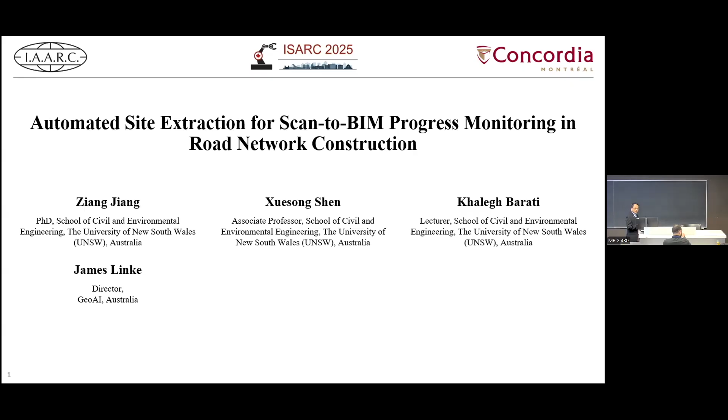Since then, I tried to take the recipe Dr. Alvarez explained this morning, and it took me 10 years to find the industry partner. Then we tried to grow from a little collaboration. Ten years later, we have grown from scratch to about $3 million in research grants with one single industry partner. This is only a small piece of the collaboration we have been working on recently.

A little bit of background about our work. We look at construction project performance, especially progress monitoring, cost and time control. As Dr. Carl explained about productivity in the second keynote today, one of the areas we're focusing on is cost overrun. According to some general studies, there's an average cost overrun of about 28% for infrastructure construction projects. I think that's very common worldwide.

For our study, we look at reality capturing, mobile laser scanning of infrastructure construction, to understand how the progress is going. Are we on the right track for time and cost? Some of the research challenges we have faced: when we're talking about Scan-to-BIM, most studies so far, as you've seen in quite a few presentations at this ISARC conference, focus on existing assets or the built environment. For example, we scan the road and then develop the BIM or digital model of the road.

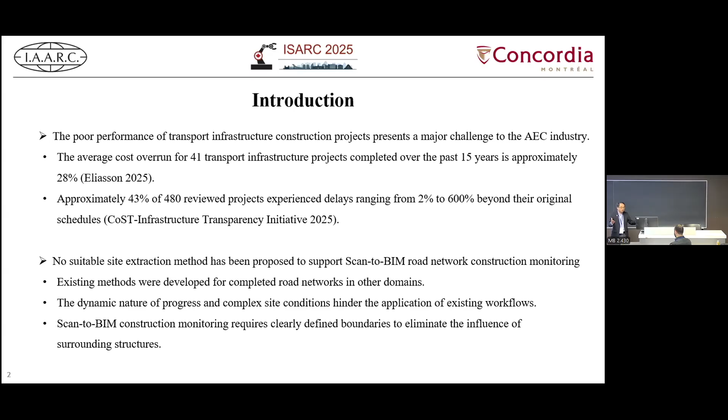At the same time, people are talking about machine learning or data-driven methods. But for construction progress monitoring, I think the biggest challenge would be the availability of data, not only the raw data but also the training samples. Who is going to collect the data for you? And who is going to process the data so it can be used as training samples? Those are some practical challenges in the construction industry.

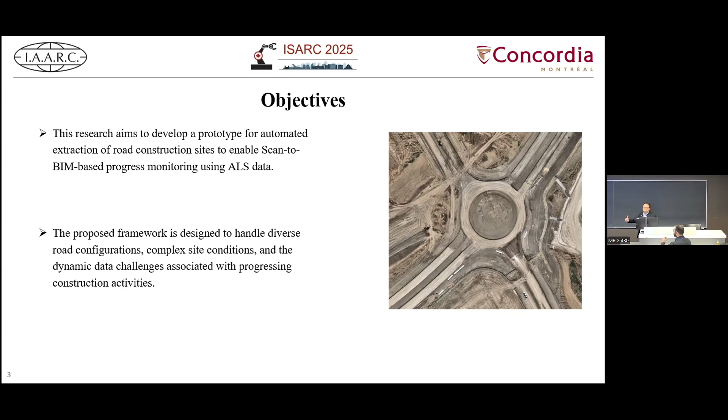That's the reason we developed this project, which aims to develop a fully automatic system that can extract the progress of road construction from some of the basic Scan-to-BIM methods we have developed. The input data is airborne LiDAR data, that's airborne laser scanning. We try to extract the boundary of the key road sections from very noisy and complex site conditions.

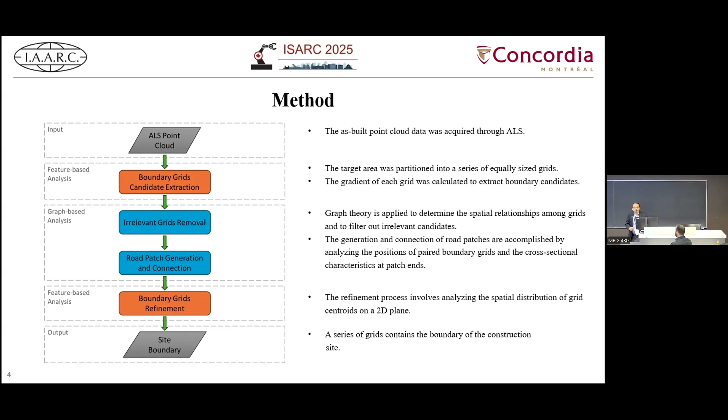Here's a quick workflow of the process. First, we take the airborne laser scanning point clouds, and Blake, my PhD student, developed some feature-based methods and also graph-based methods. Finally, we combine them together to generate the site boundary from this process.

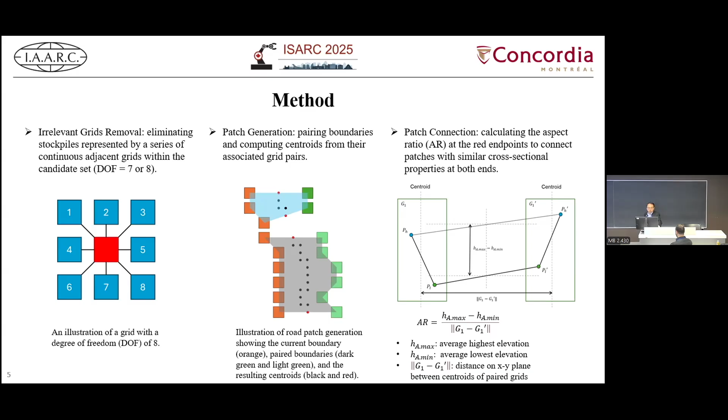Here's a little insight about the methods. In the first stage, when we look at the actual area, we focus on the construction site. Blake has developed methods to eliminate the information we don't need, for example, stockpiles of raw material, which are not relevant to the road construction. Other methods cover patch generation, defining the boundary of the road, and determining the center of the road.

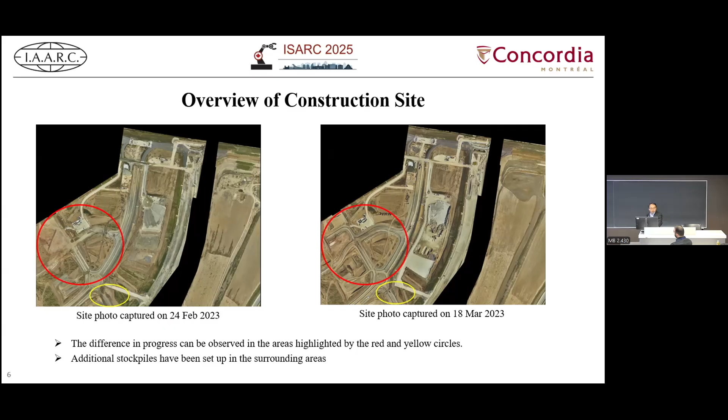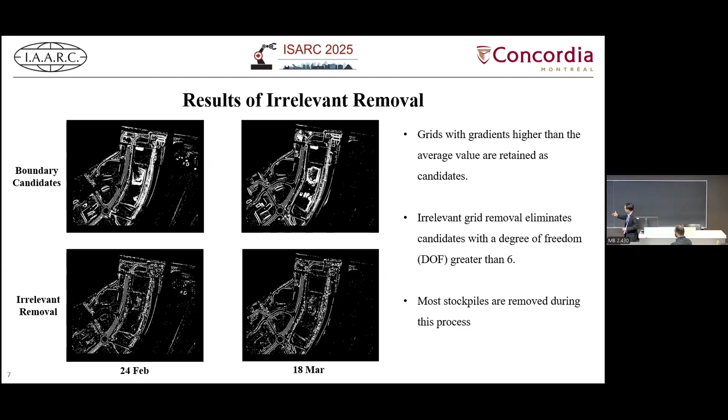Here's the case study we conducted with data from the new airport in Sydney, the Western Sydney International Airport. They conducted airborne scans of the construction site for the whole airport on a monthly basis. Here we took the data from 2023. You can see the differences over one month. These are results at different stages: define the boundary, remove irrelevant information, and eventually generate the patches of the road from the boundary.

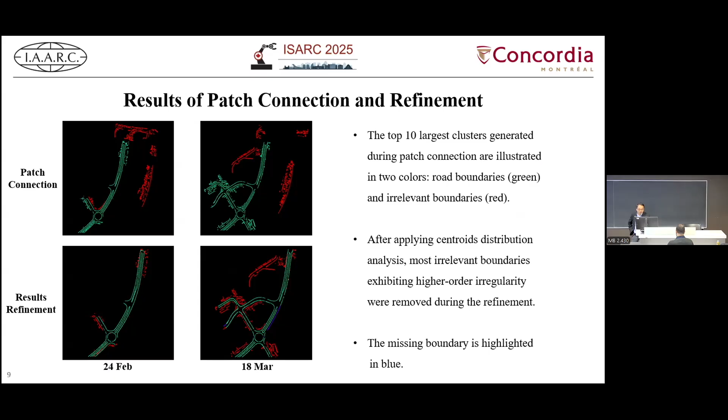Limited by time, I won't go through too much detail here, but this is about the patch connection and the refined results for road extraction. Some statistics: on the right-hand side is the comparison of progress over one month for the main road section of the site. Based on statistical analysis, we achieved over 94% accuracy for road extraction. Again, that is quite different from the BIM model yet.

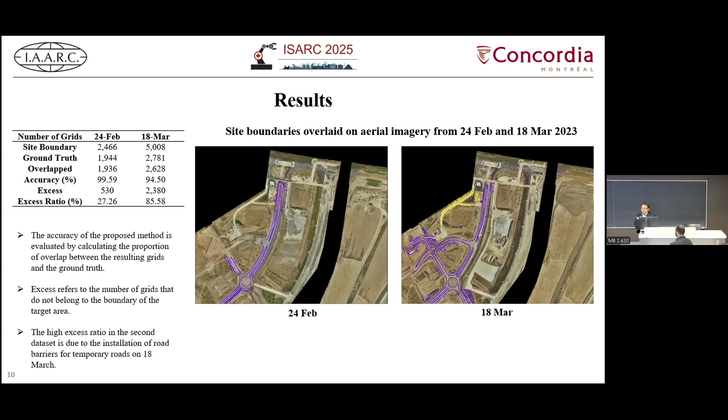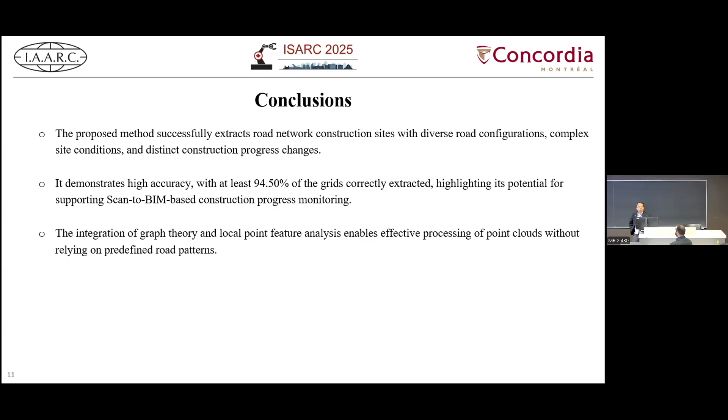So to quickly conclude the findings of this study: we extracted the road network of the construction site from airborne LiDAR data, which is complex and contains a lot of noise. We achieved 94.5% accuracy for road extraction. In future work, we will try to further improve the performance and combine the point cloud analysis with other sources of data.